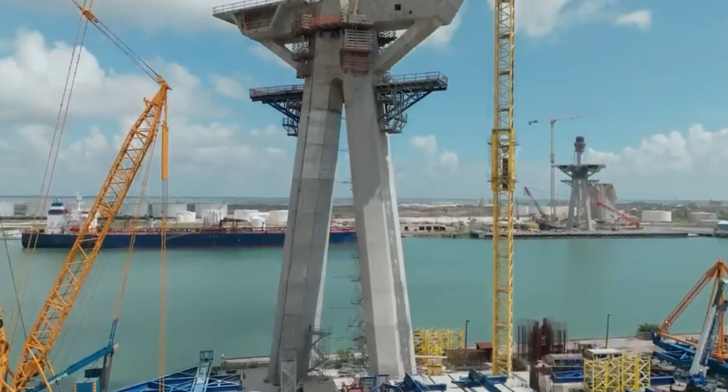Imagine a massive bridge that's supposed to be Texas-sized, bold, and groundbreaking. They say everything's bigger in Texas, right? We're talking about the new Harbor Bridge in Corpus Christi, a colossal structure stretching a staggering 506 meters across the Ship Canal. This is set to be one of the most significant cable-stayed bridges in America, designed to replace the aging structure currently standing in its place.

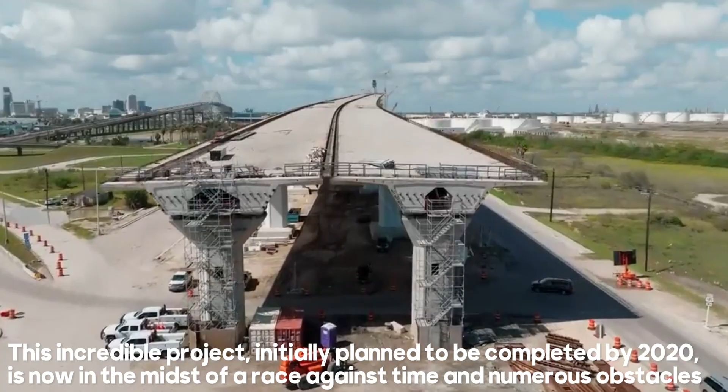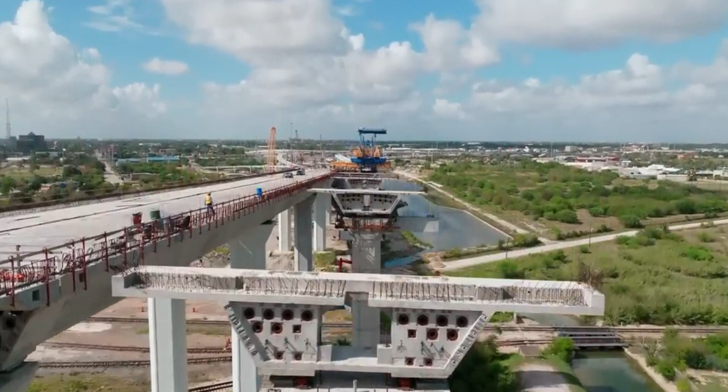But here's the twist: if it ever gets finished. This incredible project, initially planned to be completed by 2020, is now in the midst of a race against time and numerous obstacles. Why? Well, halfway through the project, investigators hit the brakes, because they uncovered something that could be straight out of an action movie: multiple safety concerns that, if left untreated, could cause this brand new, nearly billion-dollar bridge to collapse.

So, what's the story here? Why is the project over budget, way past its original deadline, and on the edge of disaster? Hold on tight because we're diving deep into this billion-dollar challenge in today's video.

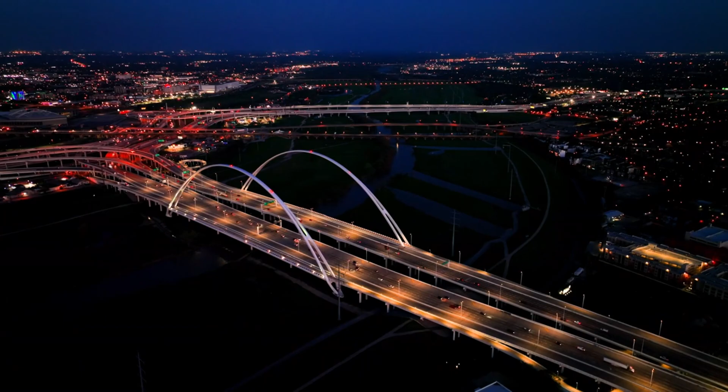Corpus Christi, Texas, it's more than just a name, it's home to one of the largest ports in the United States. This bustling city has been a critical gateway into the nation for over a century. As the world evolved, so did Corpus Christi. When the oil and gas industries boomed following World War II, this port had to level up. The solution: a brand new bridge.

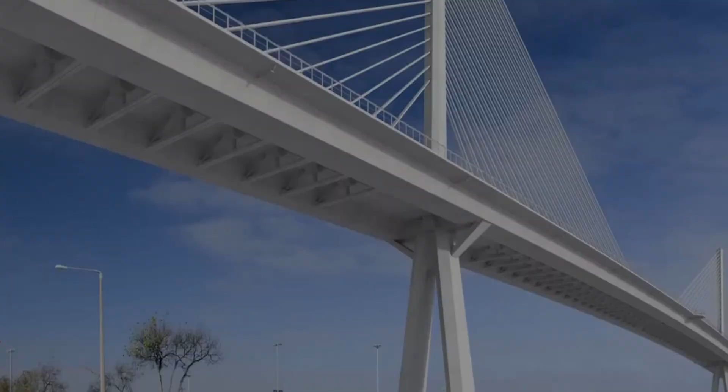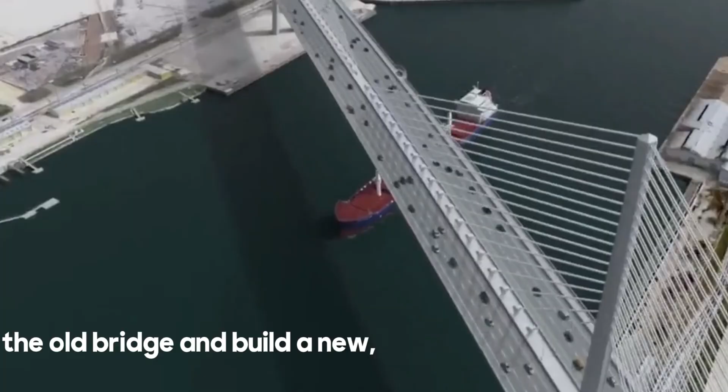Enter the original Harbor Bridge, a triumph of engineering back in the day, constructed without the modern computers we take for granted. When it opened in 1959, it was colossal, rising to heights that allowed even super tankers to glide through, a significant economic boost for Texas. But as time ticked on, the old bridge started showing its age. It was like having a classic car: sure, it's charming, but it's not very practical for today's needs. The new generation of massive ships and higher safety standards demanded something different. So, the decision was made: it was time to retire the old bridge and build a new, more efficient one.

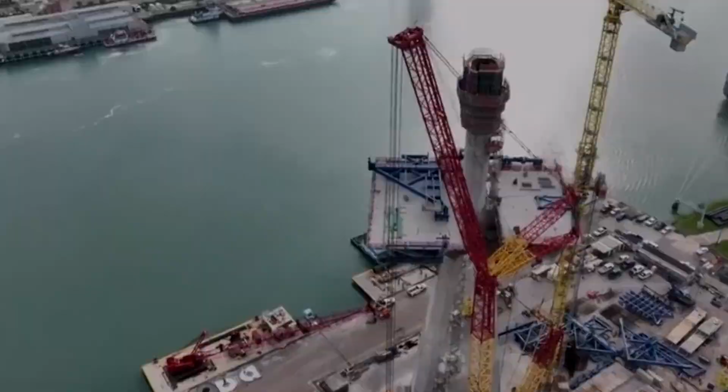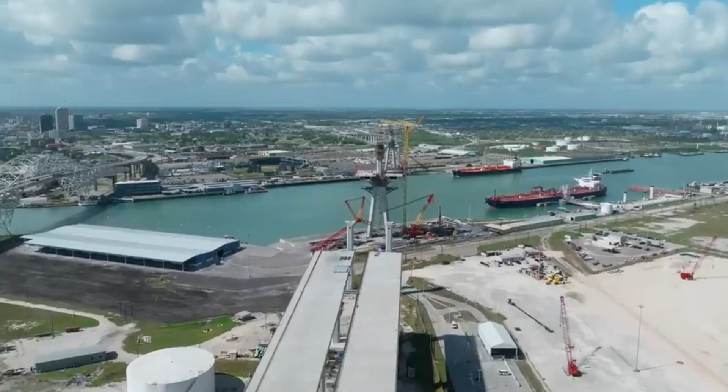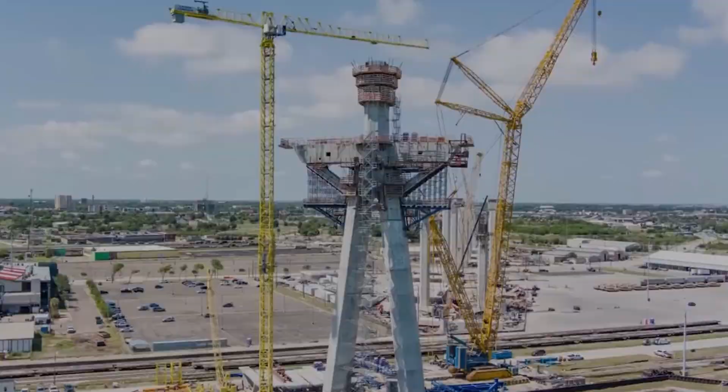Now, where were we? Ah, yes, our billion-dollar bridge. Keep your seatbelt fastened, we're just getting started. So, we've got this remarkable project in place, the new Harbor Bridge. Construction started in 2016, and it was supposed to be done by 2020. But as you've probably guessed, that's not the case. What happened, you ask? Well, imagine this: work on the bridge halted not once but twice. Why, you wonder? Hold on to your hard hat, this is where the plot thickens.

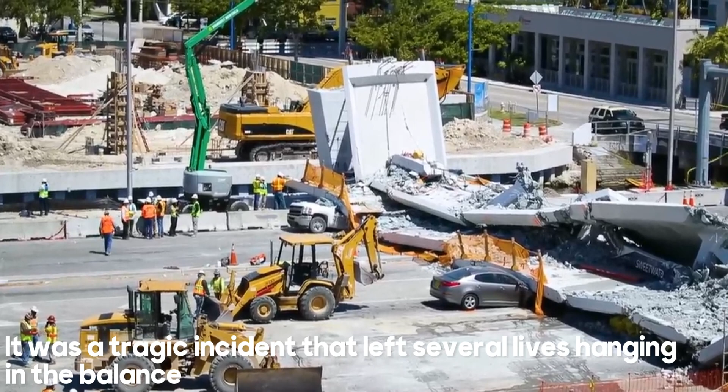The first pause happened in 2019 after a pedestrian bridge in Florida collapsed. It was a tragic incident that left several lives hanging in the balance. And the kicker? The same engineers, the Figg Bridge Engineers, were working on our brand new Harbor Bridge in Texas. Now, if you're wondering why a Florida bridge has anything to do with our Texan saga, here's the connection. The collapse in Florida was due to an error in the initial design, a design by the very same Figg Bridge Engineers, the one now overseeing our Grand Texas project.

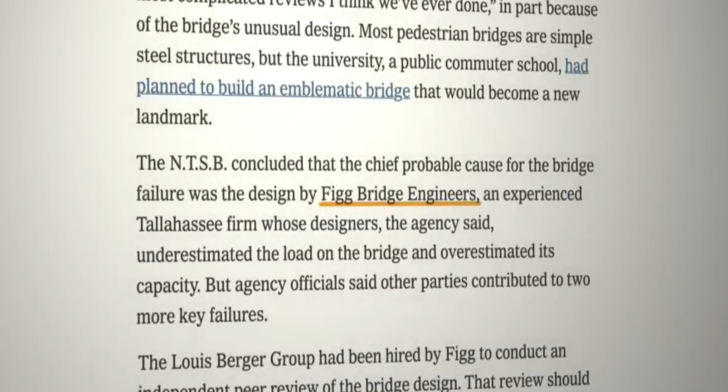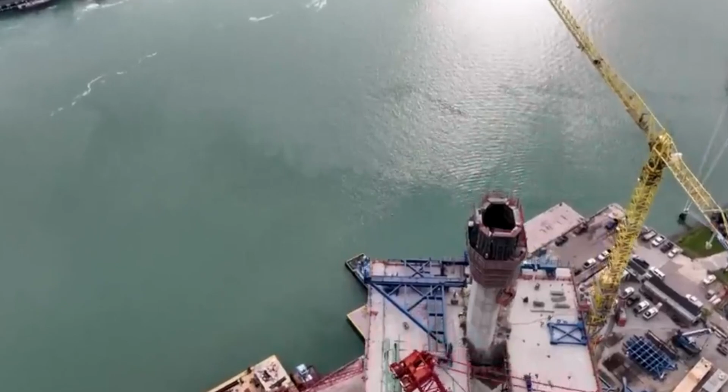The Texas investigation, understandably, uncovered safety concerns. So, what did they do? Figg Bridge was out, and new firms were in. Construction got back on track in 2021, but not for long.

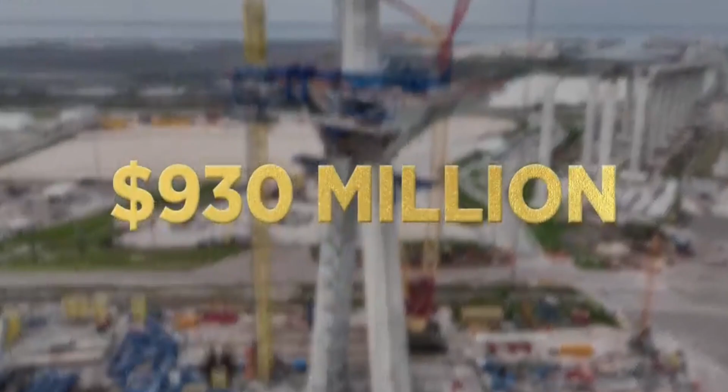The bridge was starting to take shape when, plot twist, an independent study conducted by a third-party group discovered 5 major safety concerns. Talk about suspense. One of the largest construction projects in Texas came to a screeching halt in 2022. Not only that, but the cost skyrocketed. From around $800 million, it climbed to nearly $1 billion. Now, we're talking about a billion-dollar bridge.

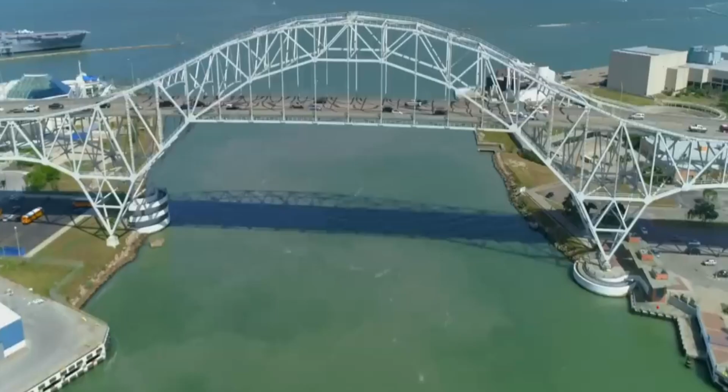With lives in the balance and tens of thousands of people relying on this critical infrastructure, the clock is ticking, loud and fast. But wait, you might think, hey, I'm just here to learn about bridges, not to hear about the secrets of the wealthy. Well, friend, don't underestimate the connection.

Just like these billionaires searching for new safe havens for their wealth, we're looking for a safe haven for all those folks who use the bridge. It's like a real-life action thriller where the stakes are higher than a billionaire's bank balance. Let's dig deeper into these 5 safety concerns and how they're being fixed. Hold on, it's going to be quite a ride.

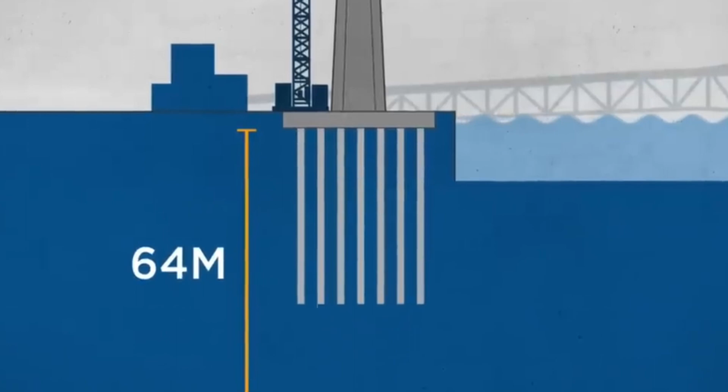The first issue lies in the foundation system, the heart of this colossal structure. The north and south towers rest on giant concrete slabs the size of 2 basketball courts. Underneath each tower, there are 64-meter drilled shafts filled with concrete and steel, like the bridge's lifelines transferring weight down to solid ground. But investigators found that under certain conditions, like high winds, these shafts might not support the weight of the pylons.

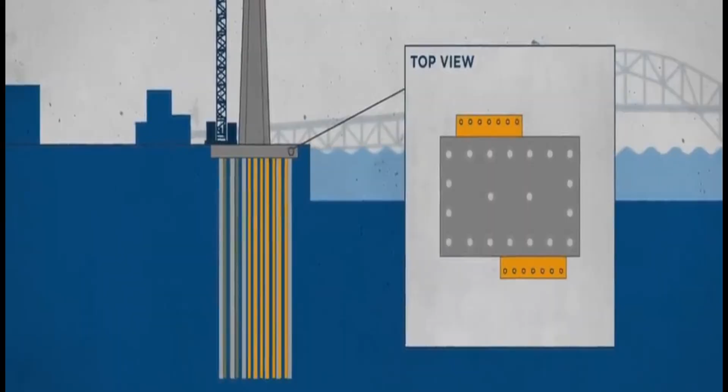Now, that's a plot twist. The fix? They're extending the foundations and adding more drilled shafts beneath each tower, like adding extra layers of armor to your hero in an action movie. This way, the bridge can hold even more weight without sinking, and hopefully, without a dramatic collapse.

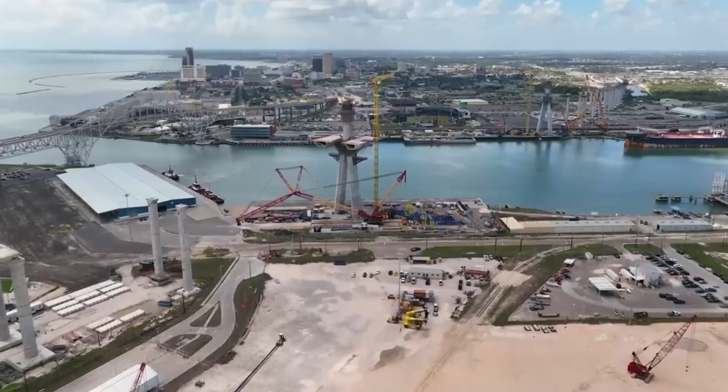On to issue number 2, the foundation caps. These sit on top of a group of piles, spreading the weight evenly across the elements beneath, like trying to hold all your straws close together so you don't drop your drink. But the investigation found that the demand on these piles exceeded their loading capacity, picture the straws about to bend and scatter your drink everywhere.

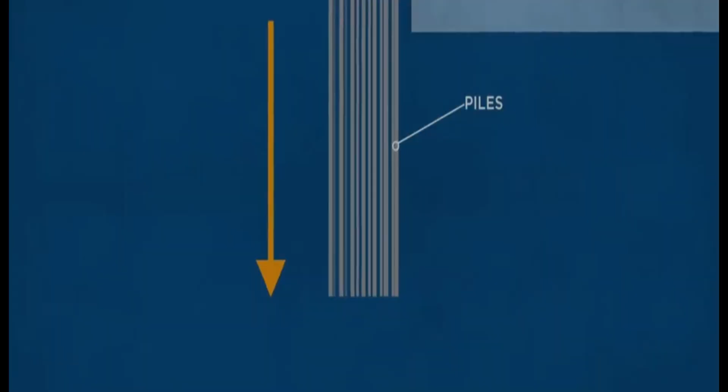The solution? It's time to create more space underground, like adding a stronger hand to hold all those straws in place. The piles will be driven deeper into the ground, supported by the newly added drilled shafts from our first solution. It's like an intricate plot twist, with each piece of the puzzle coming together.

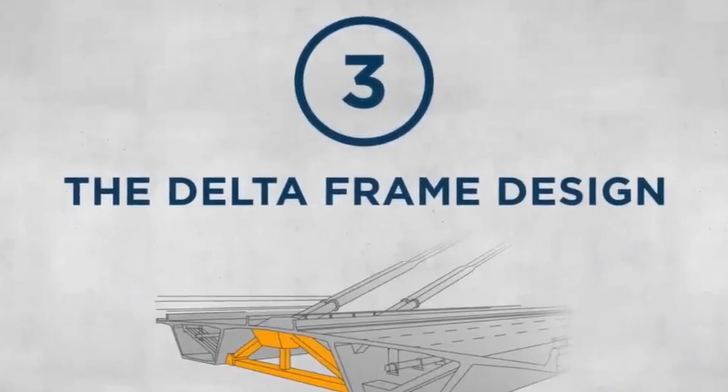Now, we dive into issue number 3, the delta frame. If this were a high-stakes heist movie, the delta frame would be the critical element holding the secret formula, a bit like the mast on a ship. Building code demands non-prestressed steel throughout the delta frame to strengthen it, just like having the right alloy to power your supersonic space jet. But guess what the investigation found?

Our new harbor bridge design didn't have these necessary reinforcements. This weakness could lead to the structure cracking. The engineers, not to be outsmarted, are roughing up the concrete surfaces and adding rebar, like they've just installed the unbreakable vault door. The bridge isn't cracking anytime soon.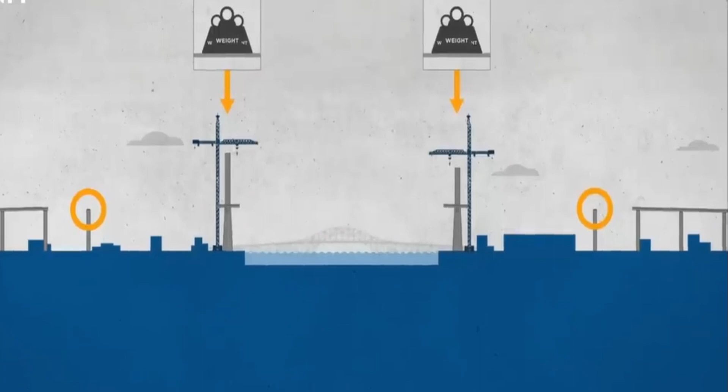Time for issue number 4, uplift. No, it's not a plot twist in a vampire movie. It's a problem with 2 of the piers. Uplift is when instead of the weight transferring down into the cables near the towers, it starts causing the structure to rise up. You can imagine this like a scene in a sci-fi flick where something goes terribly wrong, and a spaceship starts to float away.

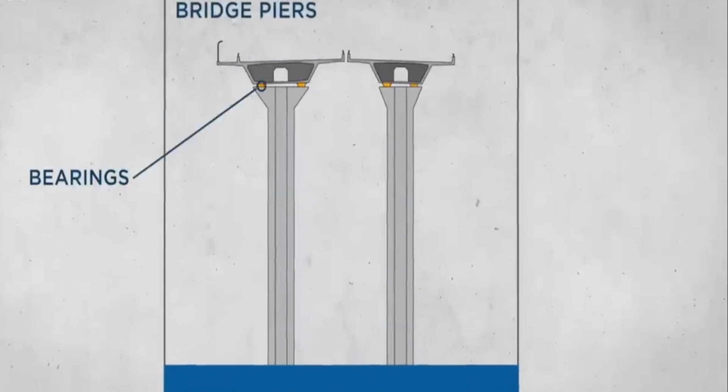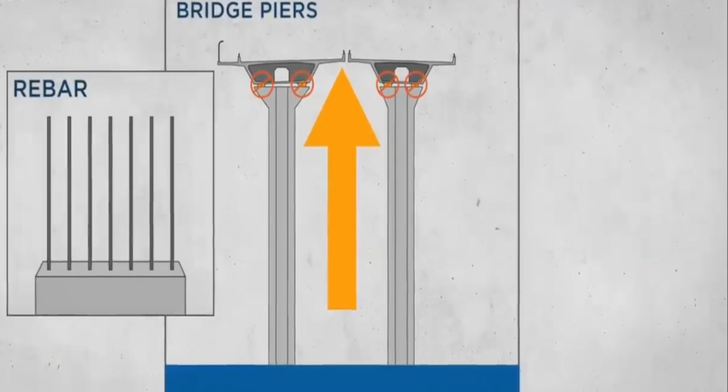Now, this isn't a good situation. The bridge's current design doesn't have the right bearings to control this kind of movement. If uplift happens, it could loosen connections and cause havoc. The solution? You guessed it, more rebar. They're adding it to the last 2 segments on both ends of the bridge and making modifications to some external bearings, like reprogramming the spaceship's navigation system to keep it firmly on the ground.

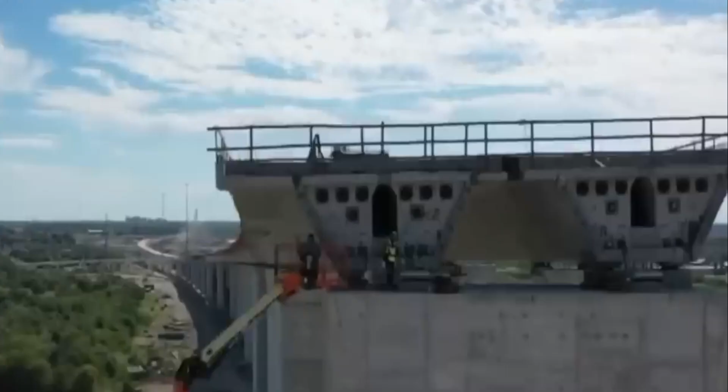Now, for issue number 5. This problem was caused by the placement of cranes during the construction of the main span. The way the equipment was set up exposed it to high winds, and that's a recipe for disaster. The incomplete bridge deck could twist. Talk about a dramatic turn of events.

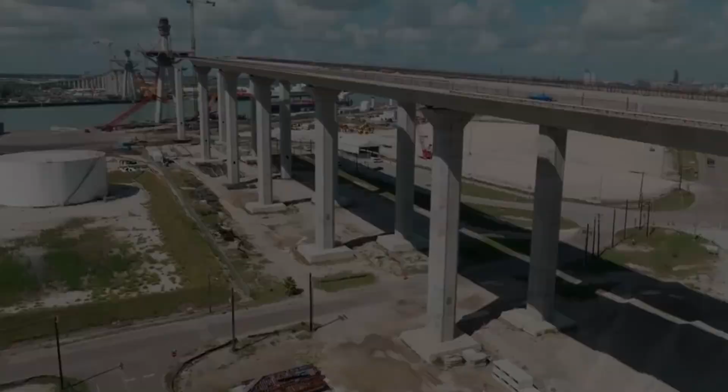What's the fix here? Workers are adding counterweights to balance out any potential movement caused by the weather, like adding ballast to a ship to keep it steady in rough waters. So, while our construction site was a little chaotic, it's now all about maintaining that balance, just like managing a fleet of high-tech spaceships. But it wouldn't be a true action-packed thriller without a sudden plot twist.

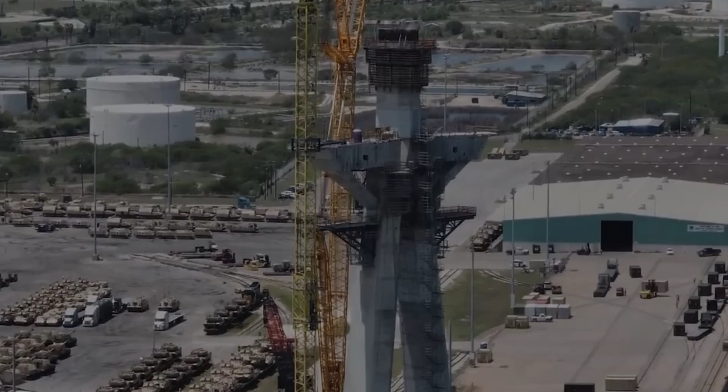In April of 2023, as if our bridge story needed more drama, one of the cranes on site caught fire. As debris rained down below, 2 workers were injured. The cause of the flames is still under investigation. It's like a fiery climax in a Hollywood blockbuster, unexpected and intense.

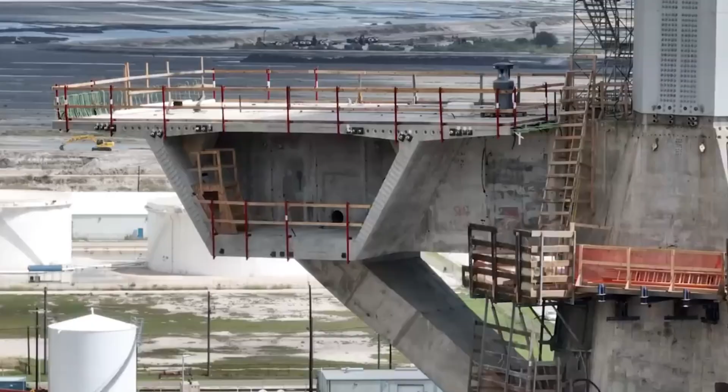Now, you might be thinking, is this bridge cursed? Is it destined never to be completed? Well, construction projects are high-stakes games, where any unexpected twist can alter the entire story. The race to fix the Texas Harbor Bridge is a powerful reminder of the trust we place in the construction industry. The stakes are high, the pressure is immense. But the outcome? It's a bridge that can shape millions of people's lives for the better. And that's a story worth telling.